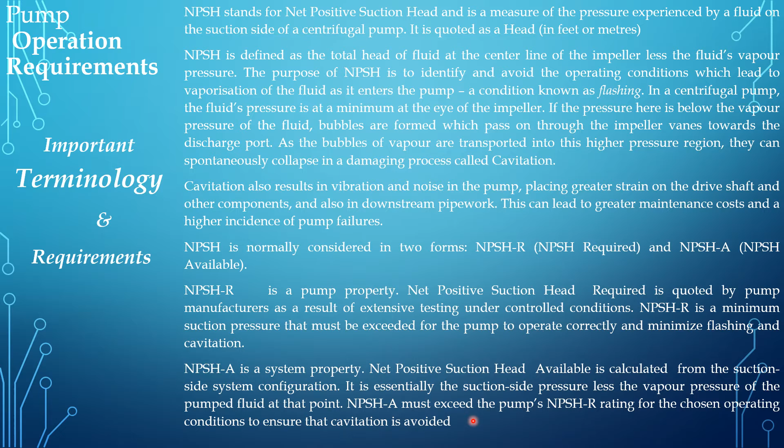The NPSHR is given by the vendor in the vendor manual. We have to keep the NPSHA more than the NPSHR by means of keeping sufficient level in the tank from which the liquid is pumped, as our suction is connected to the pump.

Now we can see the sources of air in pipelines. Air present in the pipe due to first time startup or startup after maintenance. When the pump is started for the first time or after breakdown maintenance or running maintenance, we have to check the air present in the pipeline. Air released from solution at sufficiently low pressure. If the priming is not proper and air is not released properly, air will be present in the suction line.

Air that enters the pipework due to insufficient seals and/or faulty connections. If there is any leakage or any flanges are not tightened properly in the suction line, then air entry will be there. Air entering the pipe from a free surface due to an incorrect design and/or incorrect operating condition.

This air present in the pipeline negatively affects pumps and pumping systems, and these negative effects include a reduction in the water cross-sectional area, an increase to the flow resistance, and possible loss of prime to the pump if a slug of air is swept into the pump case during a restart, causing a partial or complete loss of prime. The creation of an environment conducive to corrosion.

If any corrosive liquid like hydrochloric acid is used, and if a proper rubber-lined or FRP material is not used for the suction line, the HCl will tend to create vapor, and that will corrode the line, and that will naturally create vapor in the line due to corrosion. Creation of turbulence and air entrainment.

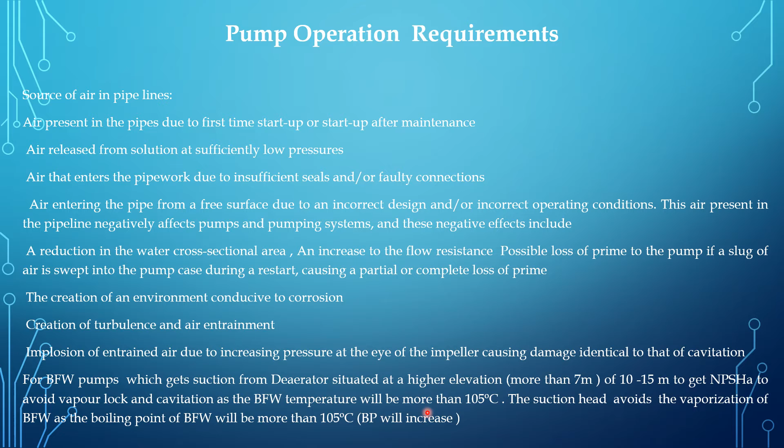Also, deaerator pressure is a minimum of 0.35 to 0.4 bar. So the suction pressure will be more than 1.4 bar gauge pressure. So vapor lock is avoided, thereby cavitation is avoided in boiler feed water pumps.

Cavitation occurs in a fluid flow system where the pressure of the liquid starts falling below its vapor pressure, due to which the liquid starts boiling and bubbles are formed. When these bubbles explode, they erode the surface of the system. This phenomenon is known as cavitation.

Trapped air in pipelines can be hydraulically transported along the length of a pipeline through valves and fittings depending on the pipeline flow rate and fitting geometry. A concentric reducer with the correct flow rate and geometry will allow air to be hydraulically transported through it. This is the concentric reducer, with air trapped within the pump inlet piping. If the geometric length of the reducer is sufficient, the trapped air will be transported and removed through the discharge vent by priming.

The hydraulic transportability of air refers to the ability of a liquid flowing within a conduit to transport free air in the direction of the flow. This free air is then normally transported within the conduit until it reaches an air valve where it can be mechanically removed, or until it reaches the end reservoir, or a position within the conduit where the fluid cannot transport the free air any further. The minimum fluid velocity required to transport free air within a conduit is referred to as the critical velocity.

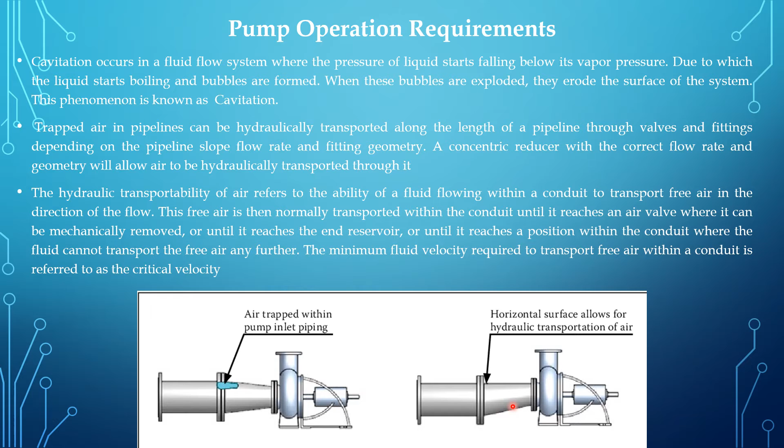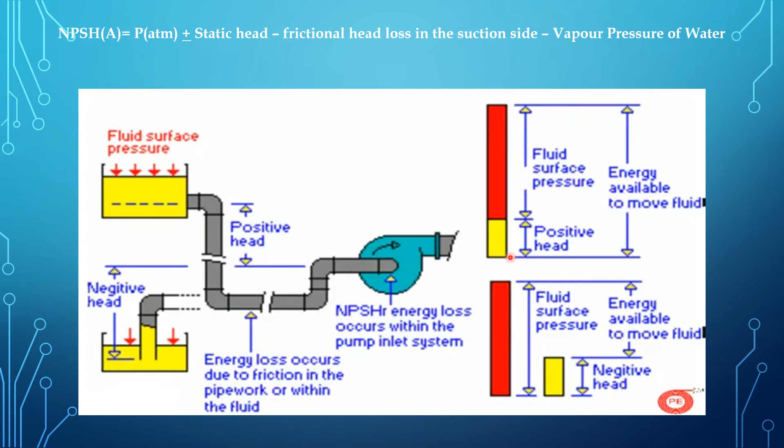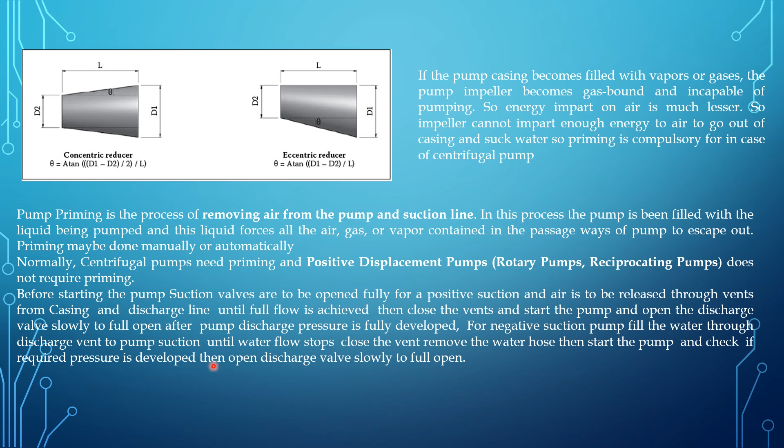For a negative suction pump, fill the water through the discharge vent to the pump suction until water flow stops. Close the vent, remove the water hose, then start the pump and check if the required pressure is developed. Then open the discharge valve slowly to full open. This is the priming procedure, mechanically or manually, for negative suction and positive suction centrifugal pumps.

Now we can see the reducer selection, conditions for the selection and reasons for reducer selection. A concentric reducer is selected when the suction pipeline is vertical, which ensures no air accumulation. So in installations where there is no potential for vapor accumulation, a concentric reducer can be chosen, and it ensures no air accumulation in the suction line. A concentric reducer can also be selected when minimum straight length of pipe is required. It will ensure disturbance-free flow.

Eccentric reducers are selected for horizontal installations where air accumulation is possible. If air accumulation is possible, then an eccentric reducer is required. That will allow transportation of air, which can be removed in the discharge line during priming. An eccentric reducer with the flat section on the top is selected; that will allow the transportation of air. Where the minimum straight length of pipe is required, the eccentric reducer will help disturbance-free suction flow. No vapor lock and no cavitation will be formed.

An eccentric reducer can be used with the flat section on the top for a suction pipe entering in a horizontal plane. That will allow the transportation of air, and the flat section on the top for a suction pipe entering from below also allows the transportation of air. So that will avoid the vapor lock or air lock, and thereby cavitation. Most commonly, eccentric reducers are used.